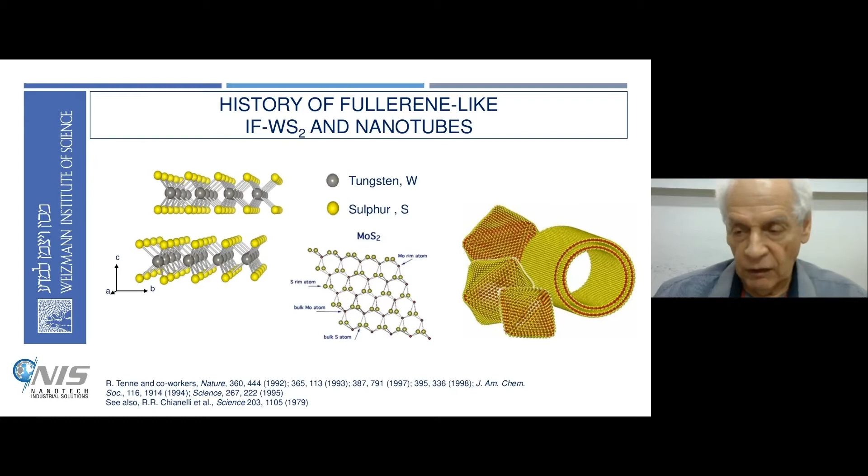And I won't go into the details why it is like that exactly and why it's so different from C60. C60 is made of precisely 60 atoms of carbon. And here you have hundreds of thousands, if not millions, of tungsten and sulfur atoms. So it's much larger. The whole size of these nanoparticles is about 250 angstrom, 25 nanometer, or even larger, and it counts many, many atoms of tungsten and sulfur.

And it took us many years to come to the possibility to see these nanoparticles in a unique phase. So basically, after large effort, we were able to find the conditions, or study the chemistry of the growth mechanism to such an extent that we can produce a pure phase of these nanoparticles. Now remember, this is a nanoscale phase. This exists only in the nano, and no materials like to remain in nano, and if you heat it up, it will always go to the macroscopic particles, which is a flat platelet. We call it platelet. Many, many layers arranged like a deck of cards.

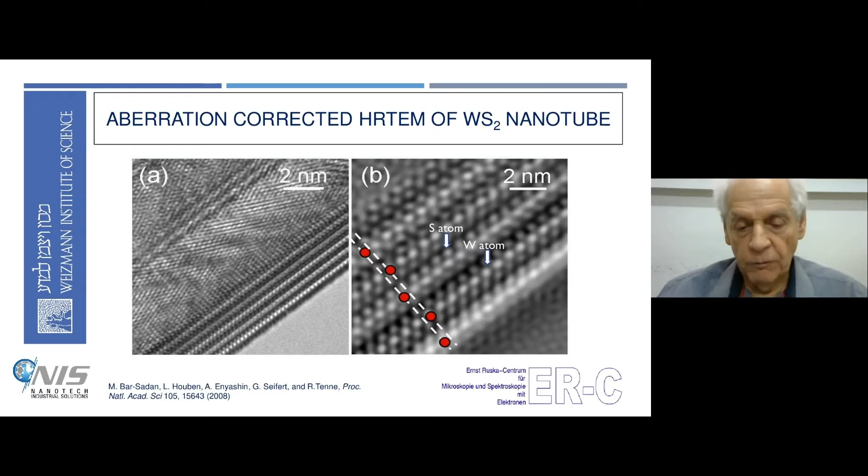So now let's go a little bit into the properties. I told you that once we learned how to synthesize these materials in large quantities, we can now look into their properties. But in fact, because each nanotube is a bit different from the other one, and each fullerene-like nanoparticle is a bit different, our aspiration is to study the nanotubes one by one, measure them as precisely as we can, and understand their properties.

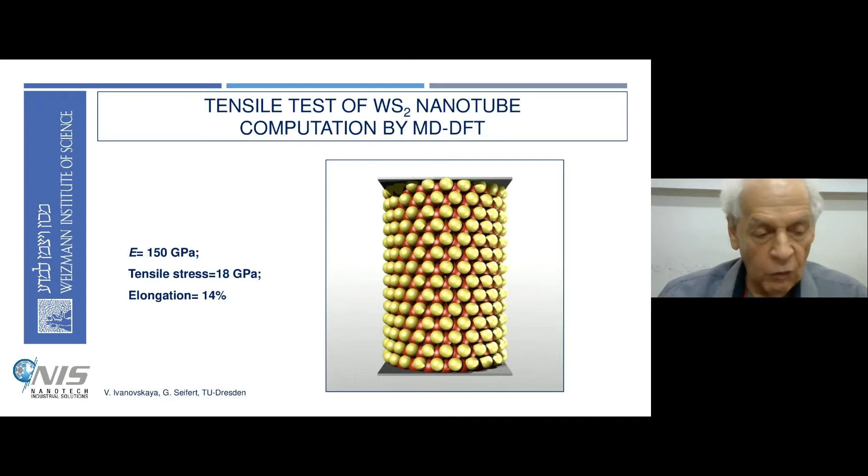So Gotthard Seifert calculated the failure mechanism of this nanotube. He actually pulled these nanotubes, moving up here and down here, and you see how the tensile stress of this nanotube leads to a failure of the nanotube immediately at the center. And this was really the same mechanism that we saw in our electron microscopy analysis of this nanotube.

So basically, I won't go into the detail, but we found two kinds of nanotubes, type 1 and type 2, it doesn't matter. What is important is that type 1 are narrow, very narrow. They are probably 30 nanometers. They are very small.

They have a hollow core, and they fail like a sword-in-sheath. So namely, all the load that we apply on it is actually taken by the outer layer, and they failed up to a load of about 6 gigapascal. So this is the mechanism that applies to this narrow nanotube.

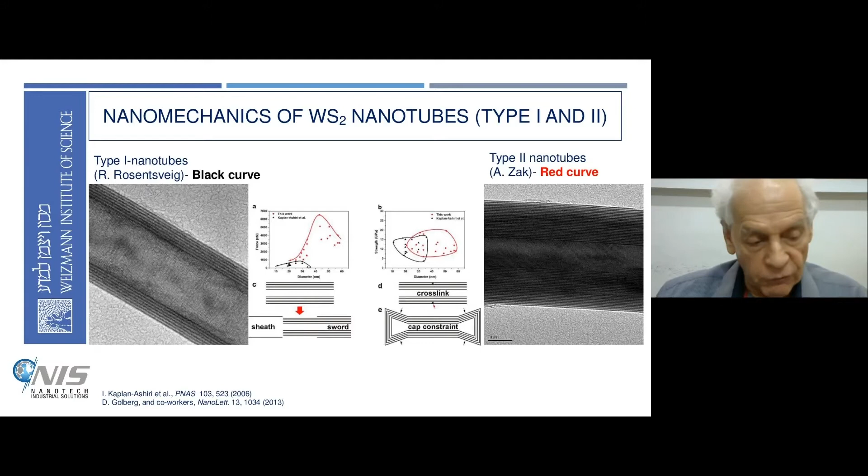Just to give you an imagination, 20 gigapascal is equivalent to 20 tons applied on your nail. So it's a very, very big force, and yet they do not fail, which shows that these materials are extremely good for a variety of applications, which you will see in a minute.

So here is an example. The video should come somewhere here. Let's see if it works. I think that there will be a video here. Let's see if it works.

Yes, so this is an experiment done by Dr. Yifat Kaplan-Ashiri, and you see the two tips. The nanotube is bonded to two tips, and you see as we press them together, the nanotube folds on itself, but it doesn't break. And this gives a new dimension to this nanotube. Not only are they strong under tensile stress, but they're extremely flexible.

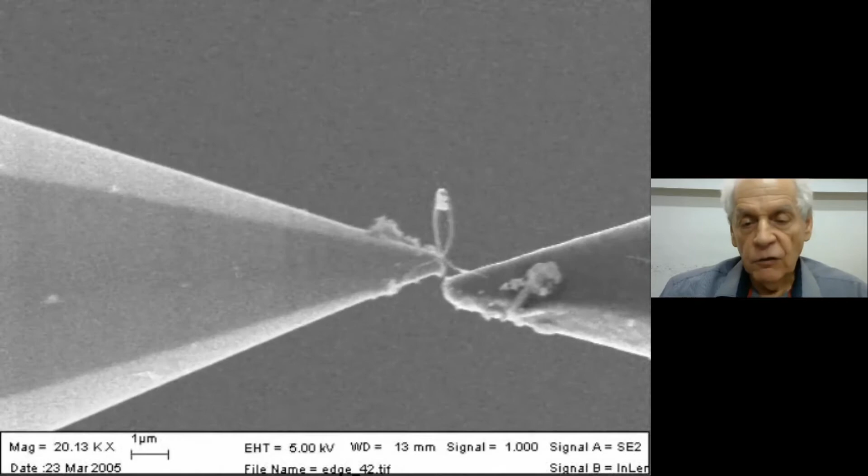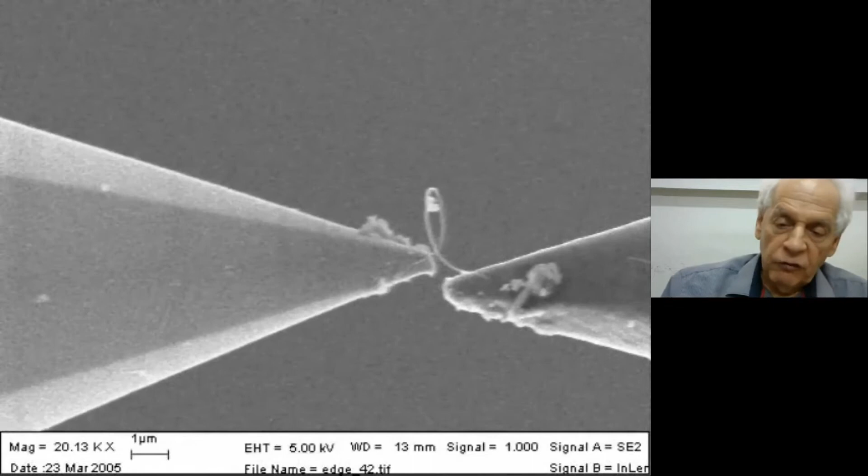And if you know the mechanics of materials, usually you see materials which are very strong and robust, like ceramic, but with very low fracture toughness. If you give it a hit, it will break. On the other hand, you have materials like rubber or plastic, which are very foldable, very flexible, but they are very weak. They are not strong. And so here you have a material, the nanotube, which is both strong and flexible.

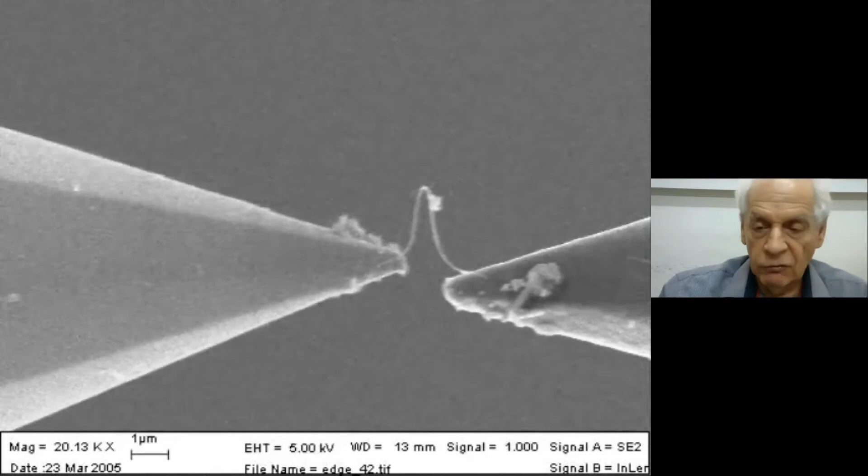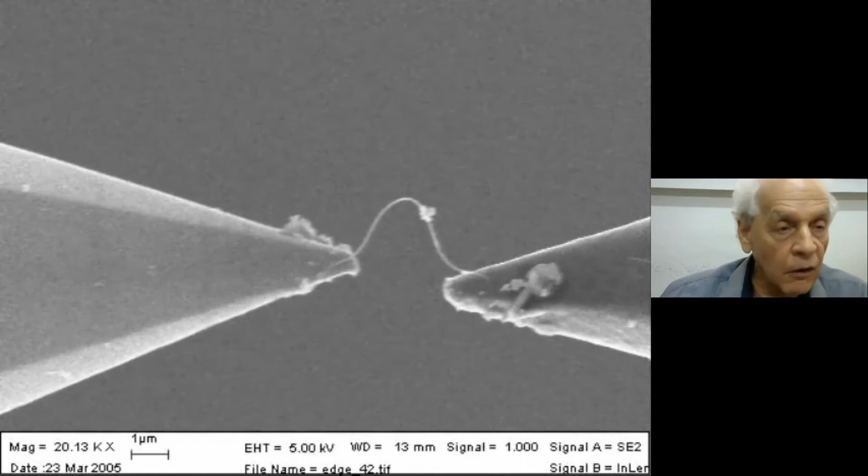And that is great for a lot of applications, because if you put a little amount of this nanotube in a polymer, you get a material which is both very flexible and very strong. And that's something that I will show in a minute. Okay, so I'll go back to the slides. Okay. So here's the slide. Now let me go to the next slide.

So let me go first to the first application, which is actually the most relevant to NIS, Nano Industrial Solutions, the company, and to its daughter company, Nanomaterials. So there are two very well known old mechanisms of lubrication, sliding and rolling.

Here is a picture taken from the tombs of Tutankhamun in Egypt, which goes back 3,000 years or so. And you see this beautiful sculpture pulled by thousands of slaves. Yet there is a person standing here pouring water or oil below the surface of this slide. And this facilitates the sliding of this sculpture by a factor of 2 at least. It reduces the force that is needed to move this sculpture from one place to another.

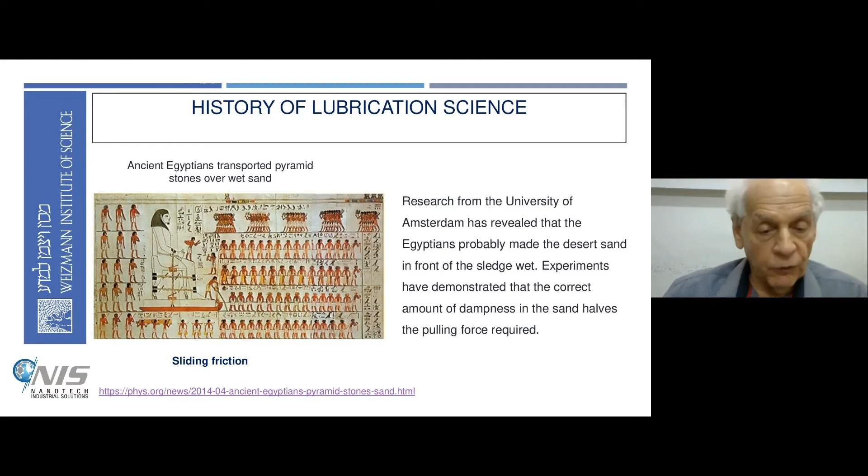You know that they sculptured very huge sculptures and stones, and they slid them over large distances to the building place. And here you see how they did it. It's a beautiful demonstration of the sliding friction mechanism. On the other hand, we also know another friction mechanism.

This is the rolling. And this is actually a picture which was also taken from Egyptian documents. So basically what you see here is a ship, and you see these two gentlemen putting logs below the ship, and the ship is progressing. The logs are simply rolled and providing a rolling friction. And these gentlemen provide the logs to these people that push them under the ship. And of course the slaves that push it together.

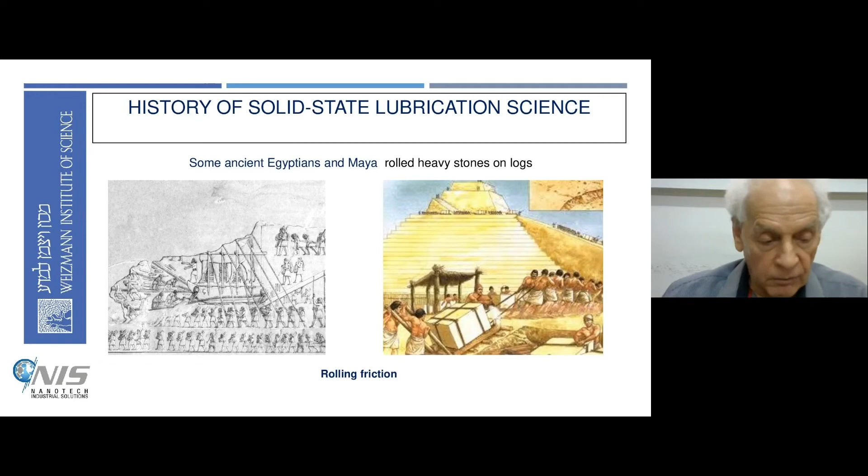And we have also evidence from the Maya. The Maya built the pyramids in Mexico. Also you see these logs here, which facilitated the movement of these large stones from their mining place to the building place. So these two mechanisms, the sliding and the rolling, are very well known in modern technology.

And here we have an example of how we do that for one single fullerene-like nanoparticle. So imagine yourself now that we go from the Egyptian time or the Maya time, and we are now modern with our modern tools. We can look at one nanoparticle, which is 100 nanometers in size, very, very small.

So you have to have a very good microscope in order to see it, let alone manipulate it. But we manage with a very articulated technique to stick this nanoparticle on the edge of the wafer, and then come with a tip and roll it. And you'll see it here in real time. You see it within the microscope in low resolution.

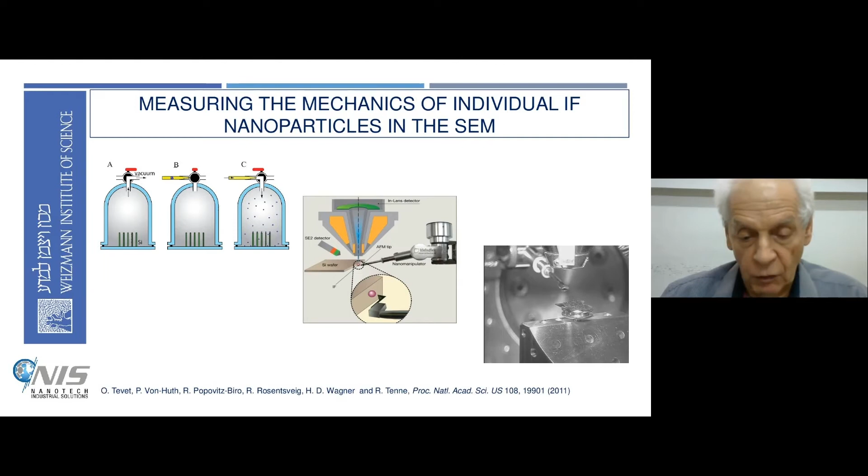And if you go to very high resolution, you see now the nanoparticle, and you see there is a red spot. In the beginning of the experiment the red spot was here, afterwards it was here, and afterwards it was here. So this means that the nanoparticles rolled under the load of this cantilever. So we have a tip with cantilever which loads vertically on the nanoparticles and at the same time pushing them, shearing them, and we see the rolling friction.

So imagine for yourself now, we see the rolling friction like the Egyptians saw many, many years ago, but now we see it on a single nanoparticle in a very clear fashion, and we can calculate the friction coefficient and show indeed this is a very good and very efficient lubrication mechanism. And we studied this in great detail. It was published by Ofer Tevet, the main student to carry out this research, again in PNAS in 2011, and you see the three main mechanisms of the lubrication.

So rolling is the one. Sliding, when you increase the pressure to 1 gigapascal, which is equivalent to, I think, 10 tons on your nail. It actually slides because the nanoparticle is already a little bit deformed, and there it slides between the two surfaces.

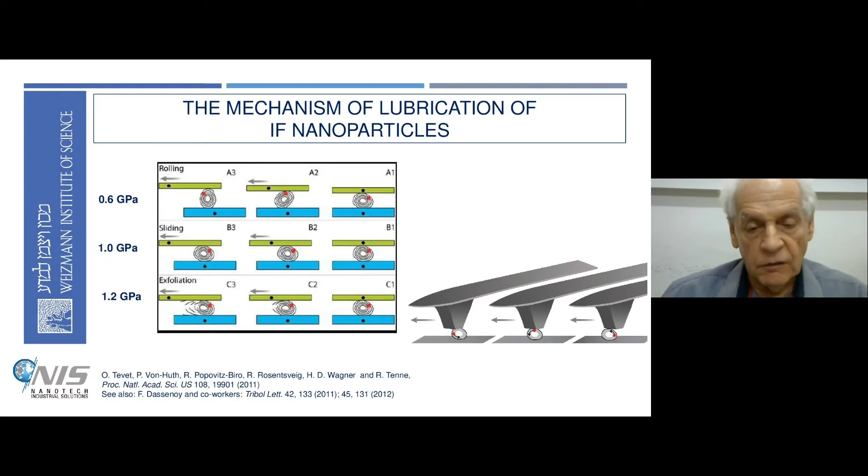And once you apply very large pressure or load, you get the exfoliation of the nanoparticles, and these exfoliated nanoparticles lie on the surface and provide extra lubrication to the surface until they are chemically consumed. So this observation was very important to verify the lubrication mechanism and to vindicate that these materials are very good lubricants for a variety of purposes.

And the applications are numerous, as worked out by NIS and Nanomaterials, and they have actually commercialized and mass produced these materials now in many, many tons, in different kinds of lubricants, including oils, greases, and metalworking fluids of emulsions of different sorts, which can be used by many manufacturers. So I won't go to the application. George can elaborate on that afterwards. I want to show you something else.

Here we demonstrate something completely different. We show how an endoscope goes into the body of a human being, because there is a need also for lubrication in medicine. Ambulatory surgeries now are very popular. If you want to push a catheter or stent or endoscope into the body, you have a small constriction, a natural one, and you use it to insert endoscopes, catheters, stents, etc.

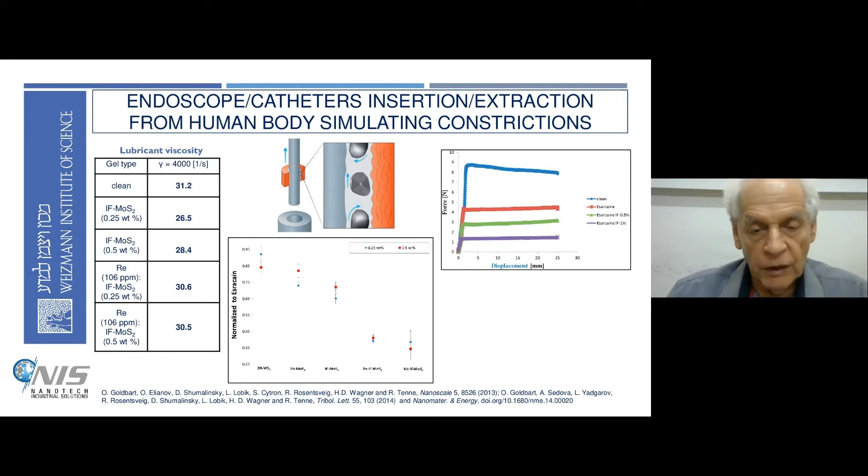And this is very meaningful because these procedures are ubiquitous in hospitals, and patients are suffering a lot by insertion and extraction of this endoscope or catheters from the body. And if you can lubricate this process, you can get a much improved medical treatment. And this is why the urologists and cardiovascular specialists were very enthusiastic to see this kind of work. So this is a major medical application which we have continued to work on, but we have not finished yet.

And this is another demonstration that if you use rhenium doping of our nanoparticles in a very precise way, and it's an extremely difficult experiment, it's extremely difficult to put rhenium in the measured amount into these hollow nanoparticles, we get friction which is so low under a very high pressure of 1.68 gigapascal, which is barely found in reality. And yet we can reduce friction from lubricants used today by a factor of at least 2 or 3, as you see from here to here. And this is true for many kinds of experiments that we did.

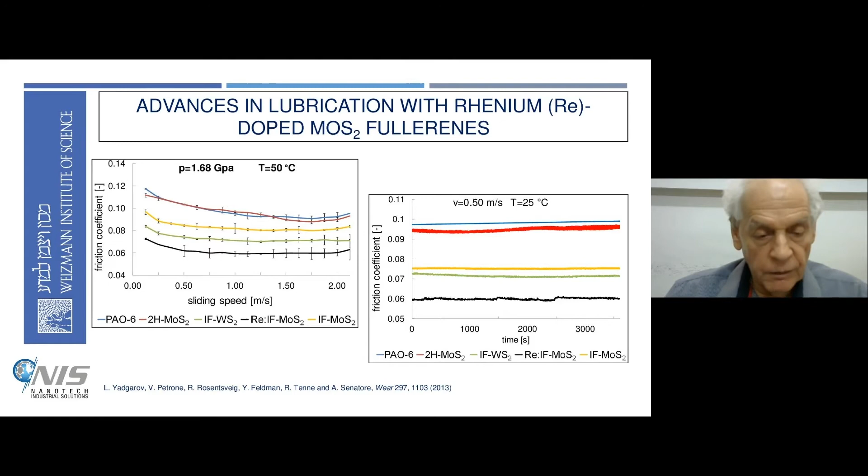So I won't go into details, but I would like to go now to the last part of my talk, and this is the composites. And we studied a variety of composites. I won't go into that, but I will show you some examples. And one example is these nanotubes, which we impregnated into polylactic acid.

Polylactic acid is one of the main polymers, a biocompatible polymer, which is used nowadays in many medical and not only medical applications, packaging, food packaging, and many applications. So now we add very little. We put here 0.25, 0.5, even up to 0.8. Usually 0.25 to 0.5 is the optimum.

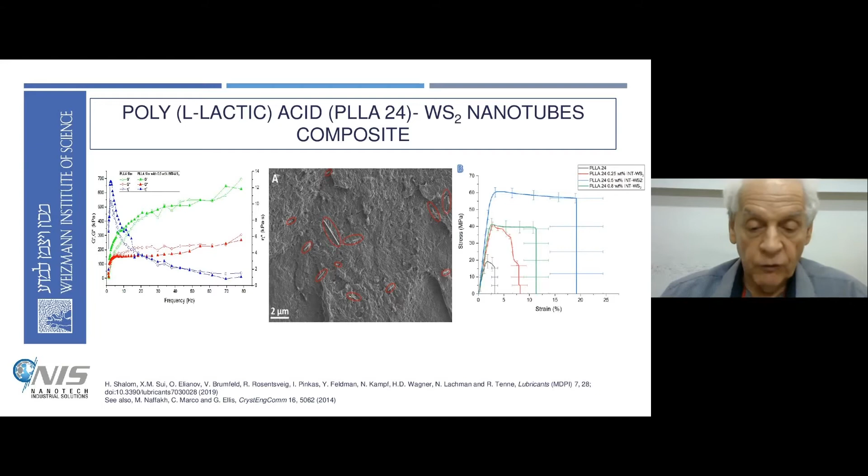At least so far, there have not been any in situ experiments yet on human beings, and it will take time until we can do that. But we are getting closer to being able to show that these materials are very useful to many medical technologies. And that's why there is so much interest in these materials from this industry, but not only, because polymers are used everywhere. And I want to show you a few examples.

So here you see a recent paper which we published, the work was by the student Hila Shalom, jointly with Dr. Noah Lachman from Tel Aviv University. And what we did is 3D printing of a prototype of a product based on this PLLA, the same biocompatible polymer with the same amount of nanotube, 0.5% or even less. And you see, I won't go into the details, how it goes through the extruder, and then the filaments that are produced by the extruders go to the 3D printers.

And here is a picture of an artificial ear that we could make from this composite of polymer with the nanotubes. And you can see it. I show it here. Here you see it in reality. So this is an artificial ear that has been produced.

And of course, the idea is not to produce an ear, but to use it, for example, for different replacements in the human body. Unfortunately, there are many car accidents, and if somebody breaks his leg or his bones somewhere, we can potentially replace them at least for a few months until the bone is fully recovered naturally. So that's the hope. And here I show you the potential of this nanotube. And here is another demonstration published recently by Dr.

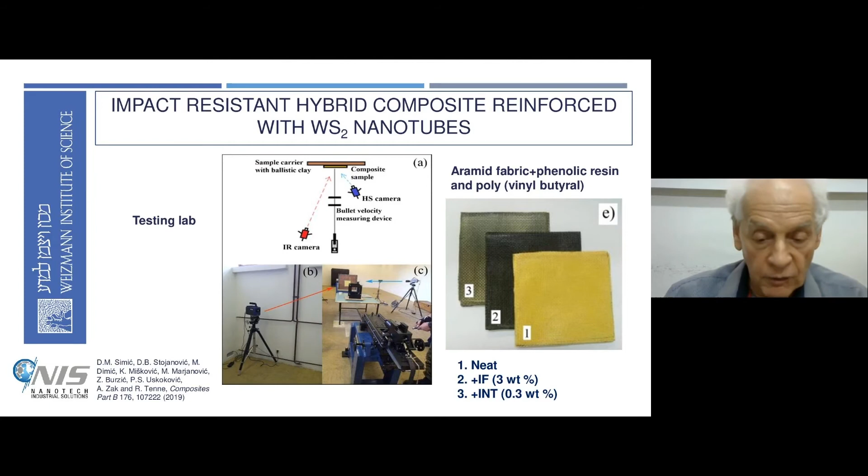So you see that they added the nanotubes, and not much. You don't need more than 0.5% or 1%. And then they did a shooting test. So they have a laboratory, and here you see the gun, and you see two high-speed cameras to show you the event of the bullet going into the sheet. And here there is a simple comparison between the two sheets.

So this sheet is the neat sheet without the nanotube, and this is the back of the sheet, and you see that the bullet easily penetrated through the sheet. While when we added only 0.3% of the nanotubes into this sheet, the bullet did not penetrate.

Now this is a magnum bullet. So it's a pistol. It's not a rifle. So the muzzle speed is much lower than a real rifle. But it's good enough to protect policemen. It's good enough to protect even soldiers, depending on the distance from the shooting area.

And here you see the pictures of the high-speed camera. You start here. The bullet goes from the front, and here there is a heat wave developing, and you see that the bullet is actually stopped here. It does not penetrate through the sheet. So here you demonstrate beautifully that by adding such a small amount of this nanotube, you provided a very solid protection of, let's say, a human being who wears this protection jacket, self-defense jacket.

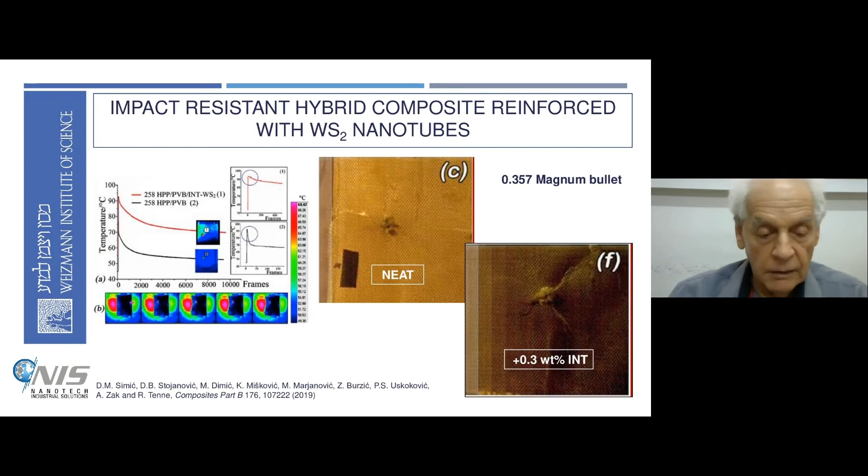So I think that with this I conclude my short presentation. I focused mainly on the first principle, how we synthesize these materials and how we measure some of their properties. I didn't go into many other details that exist. And eventually I showed you some very novel applications. I hope you enjoyed these slides.

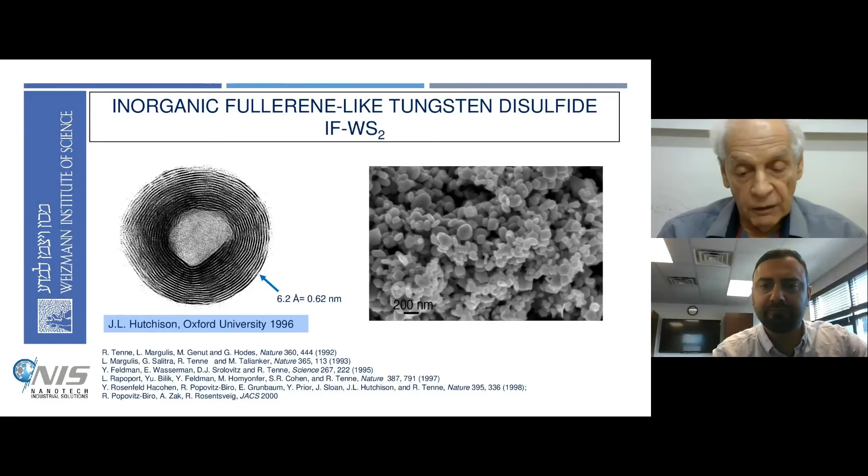It is important that their rheology is very good, namely they mix very easily, disperse very easily, and eventually they provide very good interaction because the sulfur atom at the edge of the nanotube provides a very good interaction with the polymer in many cases. So we have a very good filler for reinforcement effect. Yeah, thank you very much. That's very good information.

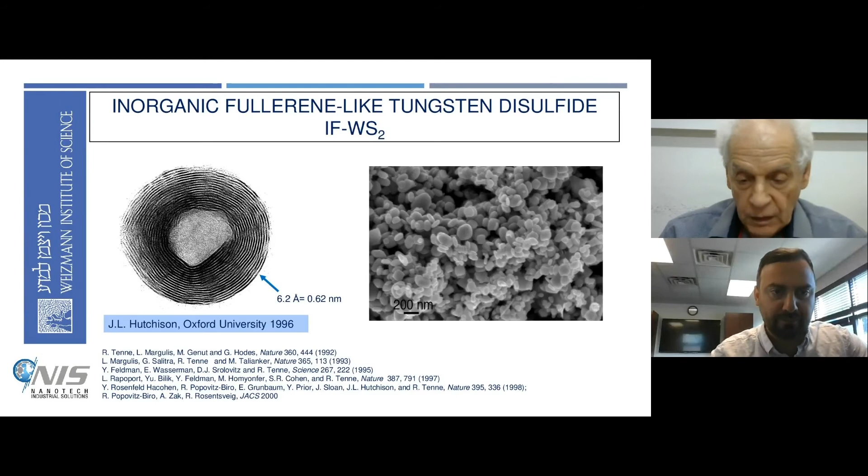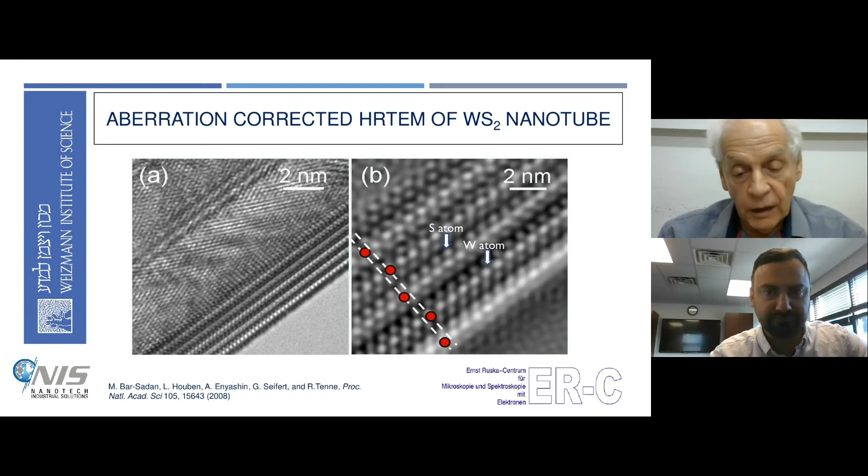Okay, next question. How to overcome the agglomeration problem in nanomaterials during storage and also in lubricating oils? That's a very good question. I'm not sure that I am able to answer this question fully. We have to use surfactants. But again, I want to emphasize the difference from carbon nanotubes and graphene: these nanotubes do not stick very strongly to each other. Of course, they will always agglomerate due to weak van der Waals interaction.

If you have 1 million nanoparticles and they stick together, they form an agglomerate of 10 microns or larger, and you break them fairly easily, either mechanically with ultrasonic or with some other tricks. And if you add a surfactant, and we published several papers, and other people published, they disperse very well, and they don't precipitate.

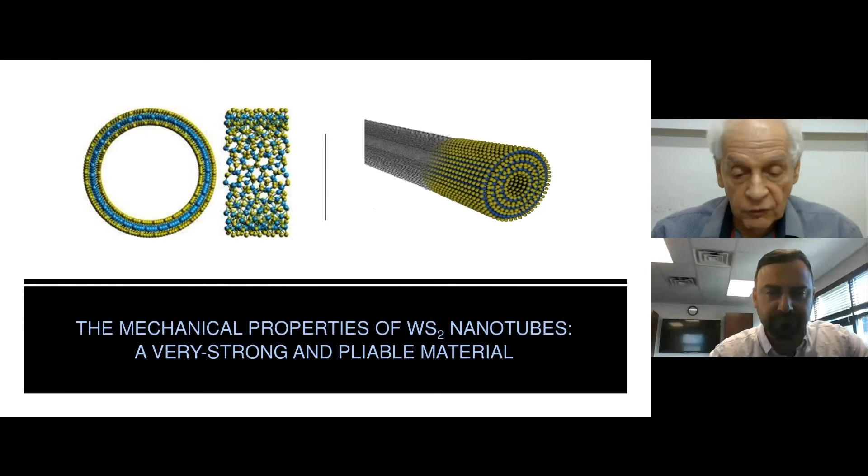And I'm sure NIS can provide an even better answer. George, you can probably provide a better answer because your emulsions are stable, even in water, as far as I understand. So I cannot address this in full, but at least we know that they form stable suspensions. Yeah, thank you very much, Reshef. I'll just add a couple of words to that.

When you work with any solids which are not soluble but they're dispersible in any liquids, it's very important to use proper chemistry and proper surfactants to make sure that you make a homogeneous and stable suspension. It is not a straightforward or easy answer to that. Yeah, we do produce oil dispersion like 50% concentration and water dispersion 50%.

But you also always need to remember that these products are dispersions. It's a two-phase product. It's solids in a liquid phase. And since we're present on Earth where we have gravity, eventually, over a longer period of time, you may see some separation. You may see some thin film on the bottom with time. But it's very important what kind of sedimentation you have.

If it's sticky polymeric, it's not good because you're not going to be able to bring it up. If it's easy to actually bring it up by mixing, it's very good. Most of our solutions are stable for a year plus, which is actually really considerably super stable. But time is also a factor here, and the density gradient has a very big impact here as well.